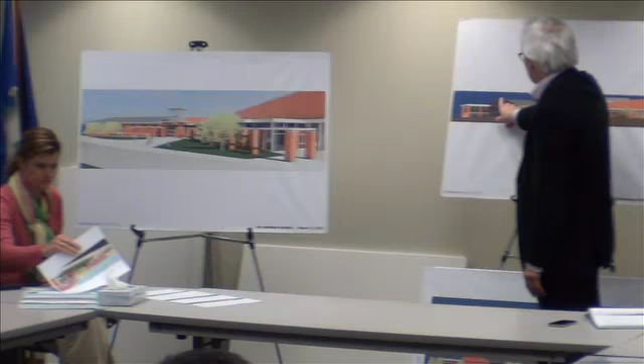So that remains the same. We also talked about what the exact vault configuration would be, and Dennis felt that the curve on the model looked better than the curve on the drawing, and we agree with that. So the drawings we showed you at the end of last week, sent out Thursday, reflect that tighter vault.

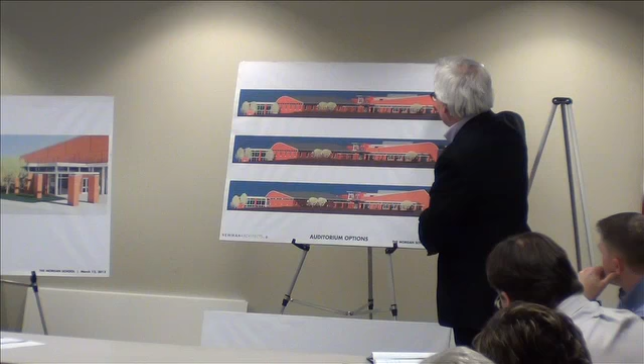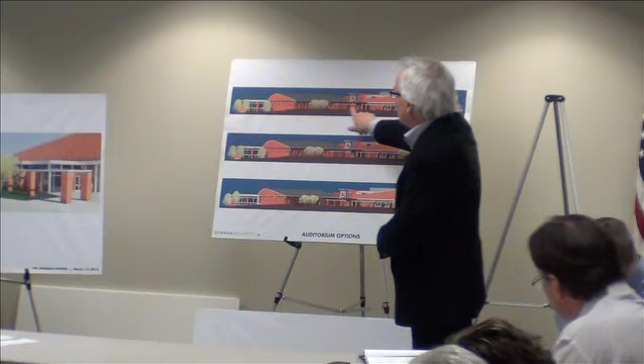So there are three views here. One shows the shed, or asymmetrical gable, on the auditorium with the vault shape over the auditorium. In all three instances we're showing the ribbon or clerestory windows on the drawing. This shows the vaulted end to the auditorium. This is a third version which shows the ribbon of windows, but instead of having vertical windows around the perimeter, it shows niches - sections of the brickwork set back into the plane of the brick. So those are representative of the choices.

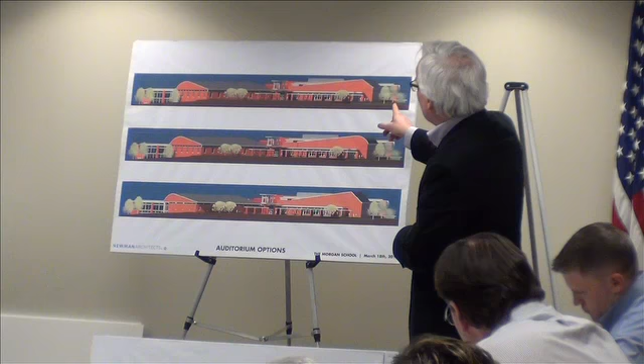Clearly you can mix and match till the end of the week and into the next, and so on. So we've really cut it down to those in this view, with the consideration of the end of the auditorium being the question.

From our perspective, looking at it architecturally and in terms of how the building elements relate to one another, our recommendation is to go with the option that has the asymmetrical gable. We think it's a very clear expression of what's happening in the room within, which is the auditorium. It differentiates itself from the gymnasium, becoming a kind of foil to its shape. This has quite a taut, angular shape, while the gymnasium has a curved shape. We like the difference.

The reason for having two vaulted forms is that it gives a greater symmetry to the elevation when viewed as an elevation. But as this drawing shows, that's not how it will be experienced. You won't really experience the building as symmetrical or asymmetrical—it will be viewed as a collection of forms that focus on the entrance. So the drive past as you go north is different from the drive as you go in the southerly direction, which is more dynamic and engaged with the landscape, depending on how it's viewed.

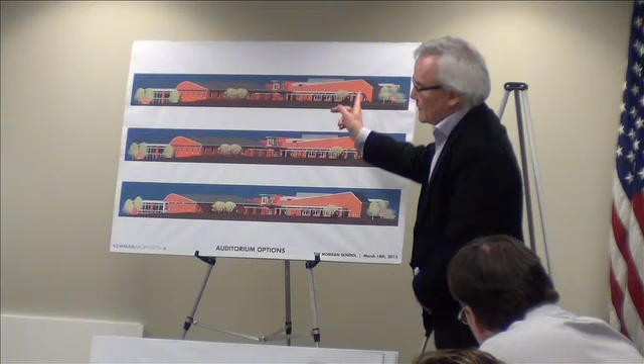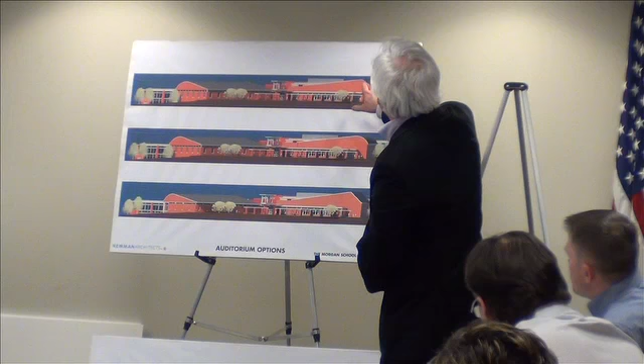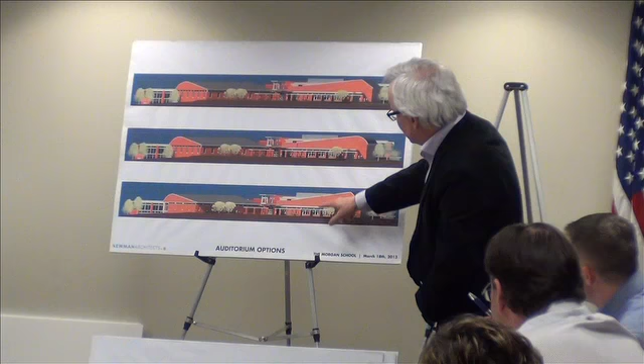What's the difference in the height of the peak on the one at the bottom? This one is a little higher, and I'm not quite sure why. Should it be? We prefer it to be a little higher, so there's a difference in the height of that gable, of that roof versus that roof. Is the auditorium the same on top and bottom, or is it just an illusion? I think your perspective is lower on one versus the other. Is that line the same? It looks like this canvas screen aligns here—it's a little lower. That's an operator question, I think it's fine. So the end wall is the same height? If you look at a classroom, that's the same size, same height, but you see more glass on one, so it's your eye level. It could be different, or it could just be where the camera's cutting. I think the building height isn't changing, it just looks taller here than there because of the camera angle.

Okay, thanks. There is a missing tree.

I just have one more question—about the clerestory, as it runs around to the other side of the building, is it continuous or does it run into the classroom? Eventually it will run into the point where the classroom wing connects to the gym. So it doesn't run all the way around, it's mostly on two sides.

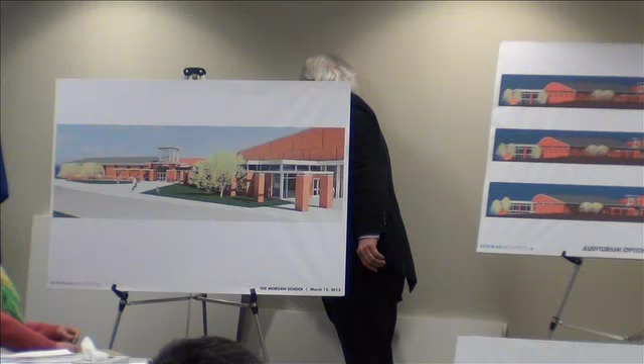And then I think it turns that corner, Richard, just briefly, right? Yes. Is it ended by that other piece—you can see it there? On that corner there's like a wall of glass. Yes, bring it up. If the clerestory started here, it could run around like that and then would hit about here.

So it's not going to be seen all the way around the building. It seems like this corner is different—in this one, the corner has actually been opened up, so that's a double height corner. That's to let a little bit more light into the corner of the gymnasium. That's a little bit of architectural license as we play with the model.

But it looks like—so this isn't a door? Well, this is a version. It's not a door down there—oh, actually there is a door down here. We need that for egress from the gymnasium in that corner. And this flight of fancy takes the glass up so there will be a view through the gymnasium, through that corner, because that's a true north corner, not looking northwest. So that was a thought about getting a little bit more natural light in that corner.

But it shows the clerestory running around the perimeter, with the niches correlating to the location of the vertical walls.

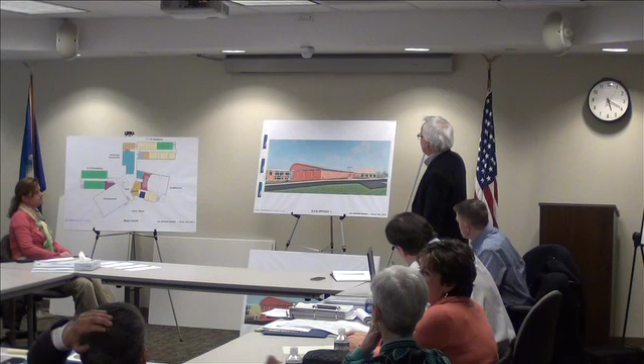Also, in that curved portion above the clerestory, are you thinking that's also brick? Yes, we're showing that as brick.

And now the roof does come down—there's a slight overhang now with the clerestory. There's a bit of an overhang because we want to somewhat reduce the light and solar radiation.

Question one is the roof on the auditorium. That's our most important and pressing concern, fundamental. The windows we can wait on possibly, but the roof is not something we can fiddle with much.

I wavered back and forth on this, and I tend to like the two structures. The middle picture gives you a sense when you're looking at it from that end that's kind of cool, but when you look at it from all other angles, I think the pitched roof or the shed roof on the auditorium has the most appeal. I like that best.

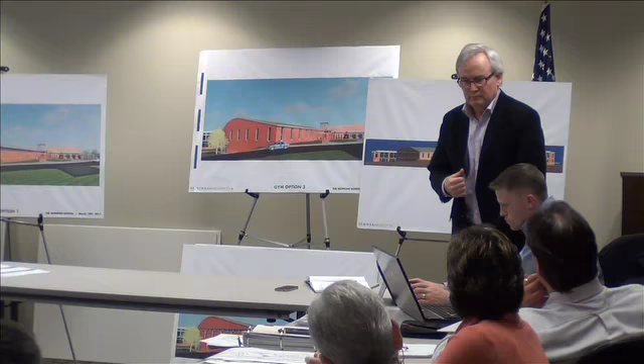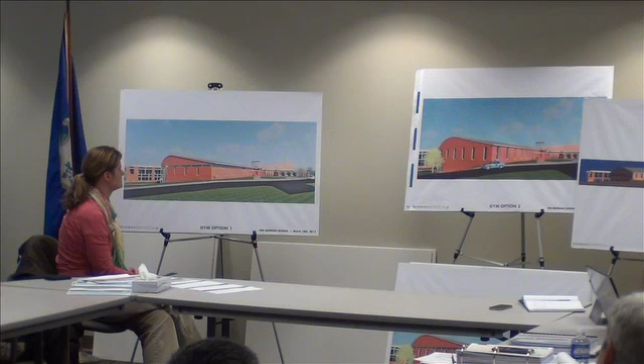Richard, is this clerestory in the same place, same line? It's in the same line, and I think that will be very... on each one now, this is always the same height, the roof never moves. So the clerestory is occupying the same space as the top portion, essentially right here. That's where the clerestory is.

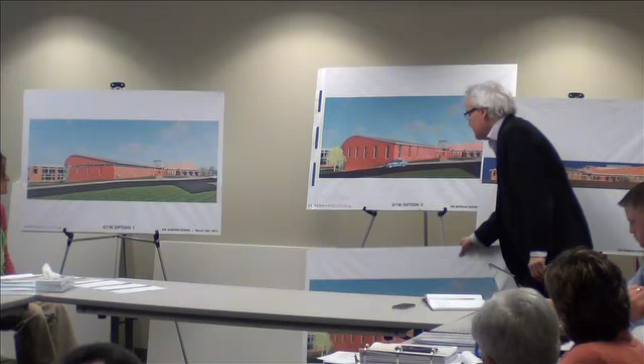So these got a little stumpier and narrower in this version. That version shows the niches. This one shows... this one shows...

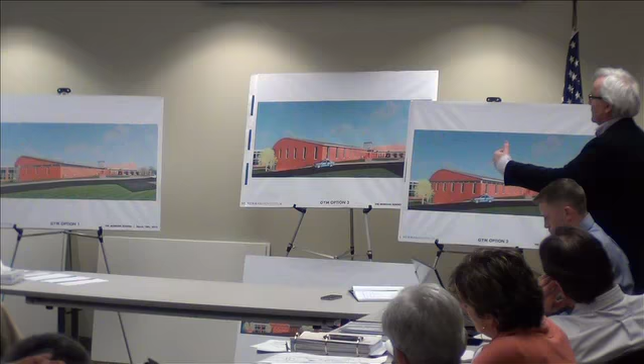The version that has the glazed openings, and we'd have to then control the inside of the glass. So now we're starting to glaze that space pretty significantly, and we would then have to control a lot more of the solar radiation.

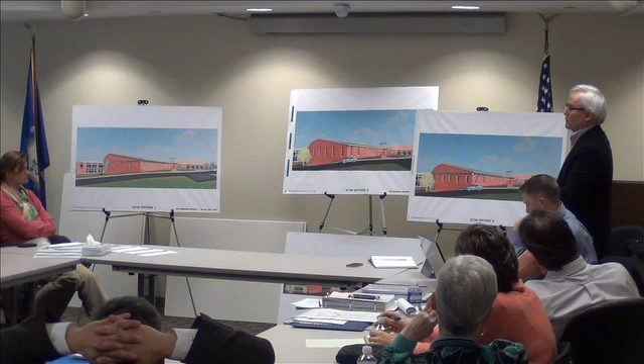From my own perspective, I don't think there should be a question about money. We're talking about $60,000, if it's a question of cost. If it's a different question, which I think is much more important, it's a question of whether it's the right thing for the school.

From where I stand, I don't really think we're finished with this. I don't think we've seen the version that does the trick for me. Although I feel that this works, I think this one creates more of an issue on the interior of the building than the other version.

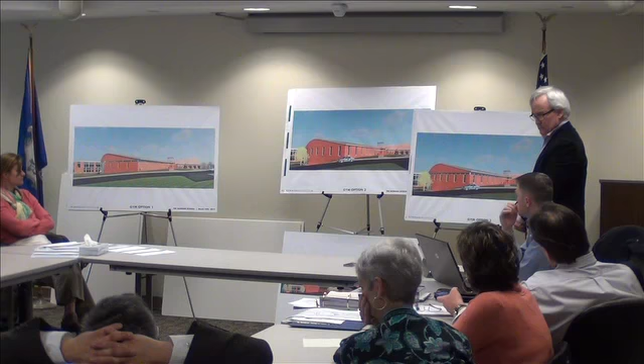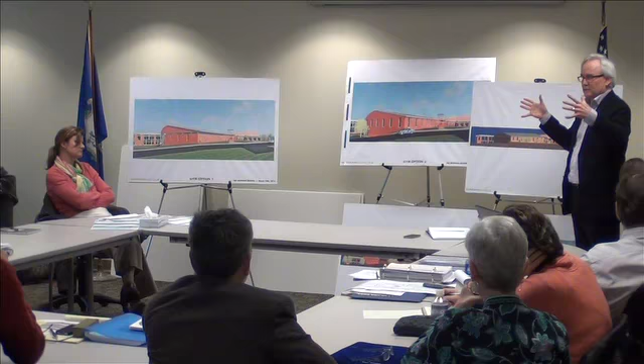What do you mean by that? Well, we were planning to do it with this notion that on the inside of the gymnasium, we create a box to receive the light and to deflect the light, a very low westerly light, deflected against a panel inside the window, and drive the light against the wall so that you would get a diffusing of the light coming from the west. So that was the idea with that concept.

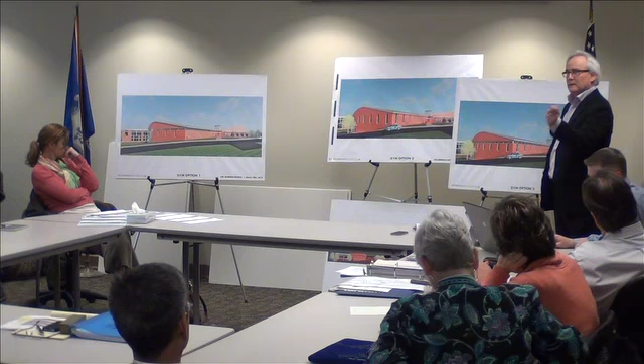Now when we move to this version, there's a ribbon of glass as well as the vertical panels of glass. So from the standpoint of solar control, it's easier to do it one way than to try to do it both ways. If we only had this, or we only had that, it would be a much better engineering proposition to address them.

Option number one, I think it needs a little shape refinement. But not a clerestory - I perhaps wouldn't put the clerestory there, but just have it along this edge, along this face, so it's underneath the eaves. It lines up with the clerestory we have over there, so it forms one line across the building.

Then allow that wall to be a wall, and just open up niches at the corner. There would be niches. Now, I'd go for that.

Would you stop your niches at the same point, or would you then continue them? No, I think we'd stop them. That's a good question, I don't have an answer. I'd put it, maybe just fill that out in brickwork. I think we have to look at it. I think it needs a little bit of patterning with the brickwork.

The comments I'm getting from people who see those pictures with those windows is that we're making it more and more modern, and getting away from the colonial New England look. We're getting to make this look like something that belongs in Hartford - getting more glass, and now you put glass on the corners with those doors, with those corner things, it's more glass. We're supposed to be maintaining a New England feel.